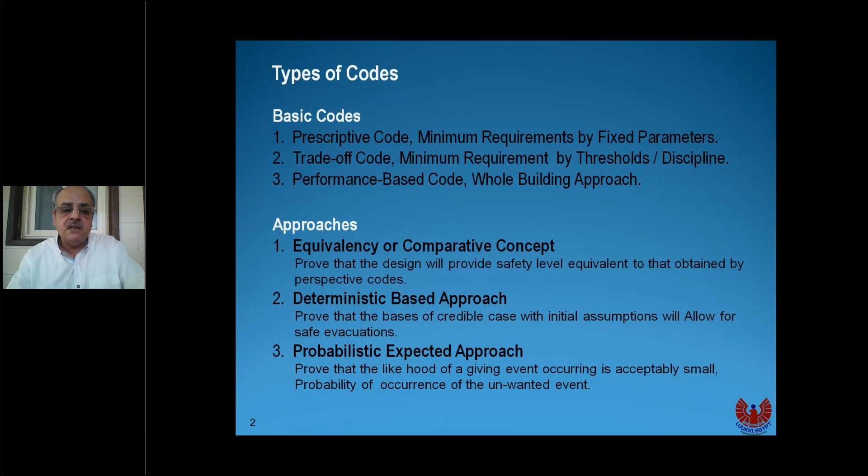Our case study is the need for robust indoor environmental quality within HCF, meaning healthcare facilities. Indoor environmental quality, to summarize, is a combination of indoor air quality, thermal comfort, visual comfort, and acoustics. In our task, because we're talking about air conditioning, we'll focus on indoor air quality and thermal comfort. The remaining acoustics or visual comfort could be discussed by other disciplines.

So if we need to improve the indoor environmental quality to assure there is no cross-infection or infection from outside to any place in the healthcare facilities, we introduced many designs for air distribution, for relative pressurization among different zones, and a lot of things.

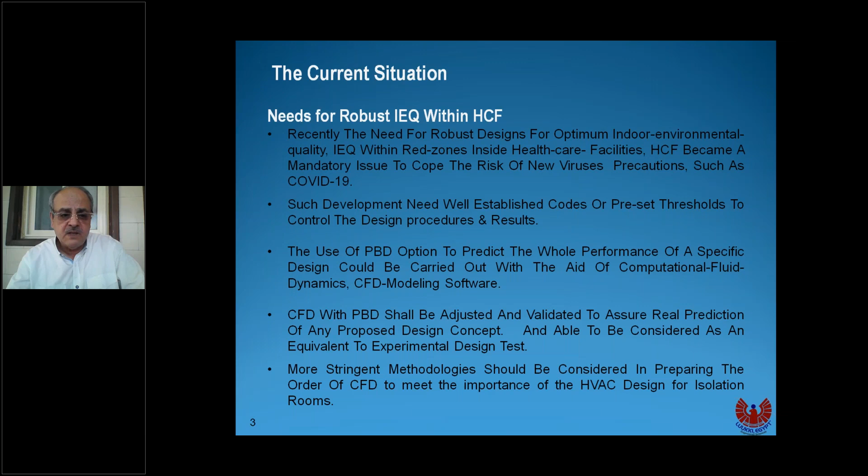Now we are meeting the coronavirus. Previous researchers on SARS before show some issues that could be common between SARS and coronavirus. For example, one of the gained data is that during a cough, there are droplets coming from the patient, about 3,000 droplets, and during a sneeze it could reach 40,000 droplets. By the way, we consider the droplet to be 5 microns.

But up to my knowledge, the COVID-19 size is not fixed all the time. It ranges between 80 nanometers to 200 nanometers. This means that each droplet will contain a lot of viruses inside it if it's 5 microns.

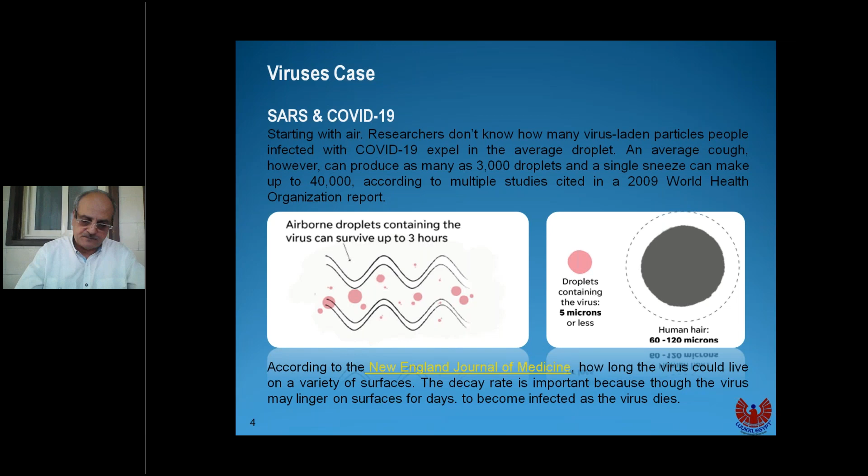We have another issue: we need some way to scavenge any viruses that stay on surfaces, on copper, on the bed, on the furniture, on plastics, on chairs, on sofas. So how can we scavenge this? At the beginning we have to know how many hours this virus can stay in ambient conditions.

For cardboard it can reach 16 hours. For stainless steel it can reach 21 hours. For plastics it could be 20 to 21 hours. This is very important to know, because beside the continuous cleaning and sterilizing of all the goods around us in healthcare facilities, we need something that can scavenge or dry out these stayed viruses.

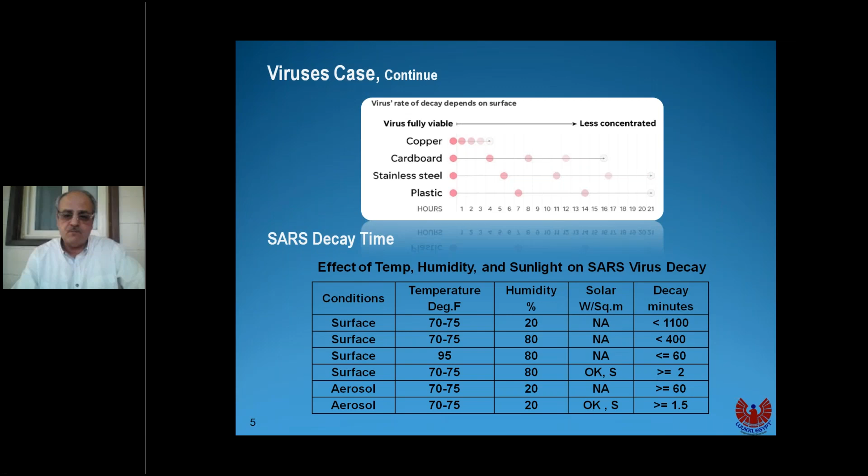A word of wisdom: one of the professional experts in numerical and physical modeling, my professor, said that everybody believes an experiment except the one who did it, but nobody believes simulation results except the one who did it.

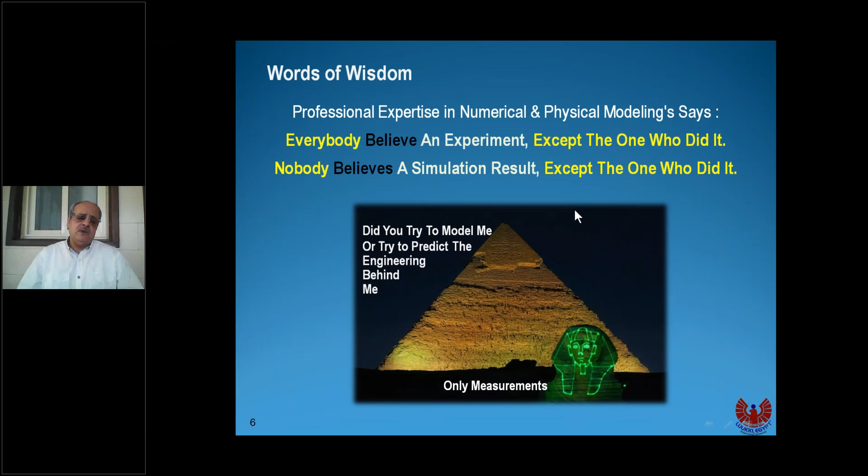Now we want to make an order. If I'm the manager of the hospital and I want to make an order for CFD to study an isolation room, we can move a little bit forward to see what we have.

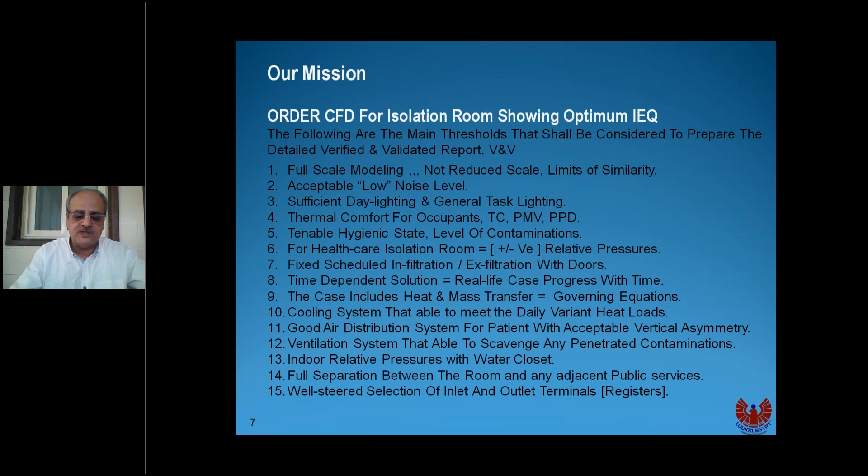Our case is very simple: it's a compound for isolation rooms. This compound is about 54 meters length by 50 meters width, and the height is 4 meters. It includes typical single and double isolating rooms. They have the same size: 7 meters length by 4.5 meters width by 3.2 height.

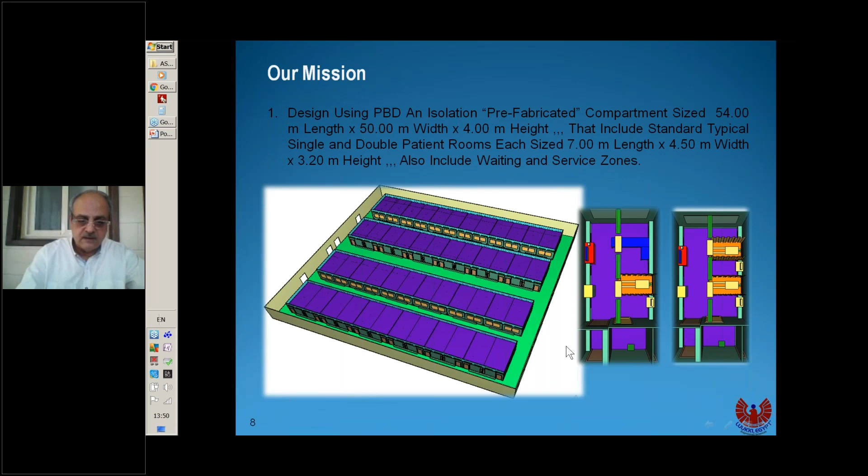What are required to show? We have to go back 20 years ago, 30 years ago, before CFD became a popular solution for the performance-based design or performance-based option. We used analytical solutions before - we can use similarity principles, we can use dimensionless groups to make the modeling or simulation. But it's not a simulation and it's not modeling, it's a pure solution.

So we have to see the flow of air inside the room, and we have to see the drop, the spread of air coming, the asymmetry of the temperature, and the same also for the relative humidity. We have to have a fixed temperature in the vertical direction to avoid any stratification, which could affect the patient or affect the doctors and the people inside this room watching the patient.

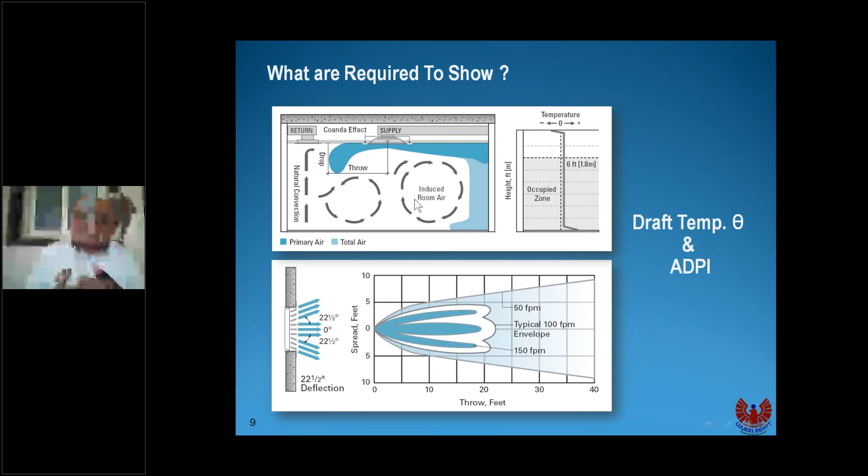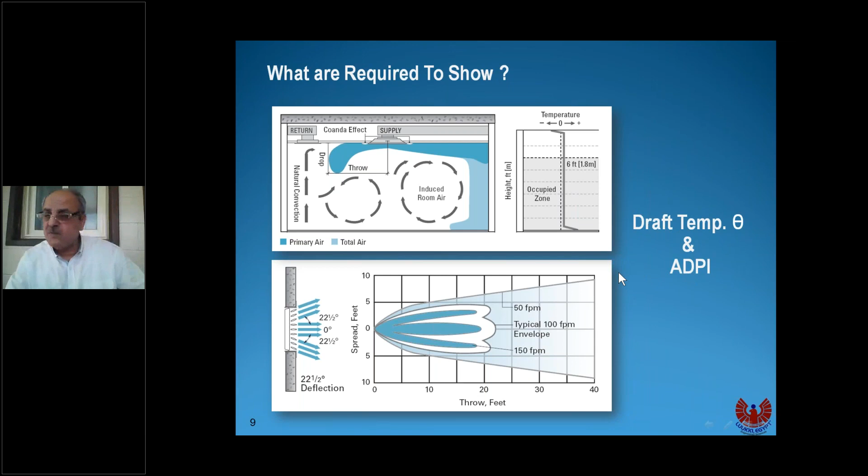Adding to this, the local air velocity is very important - the induced room air that penetrates inside the air coming from the jet, which is delivered from the supply outlet. This is what we call the induction ratio. All this together, we call them two equations: the draft temperature theta and the air diffusion performance index. This means we will use this factor to validate or guide us, to check if our CFD or simulation is going in the correct way or not.

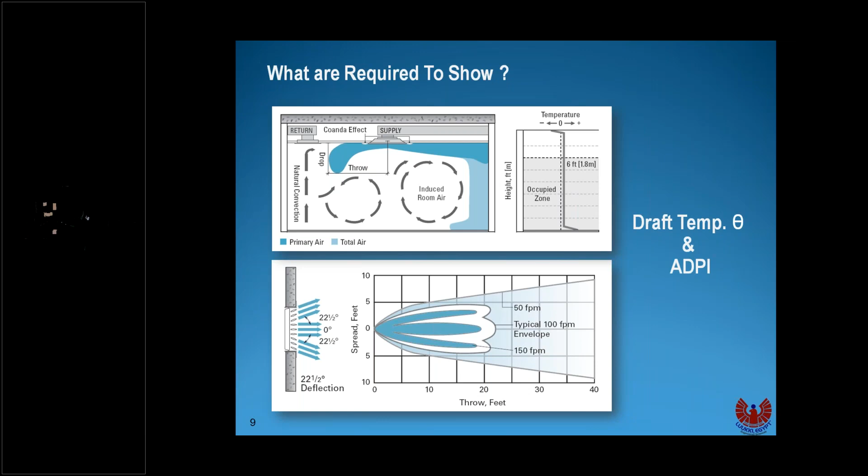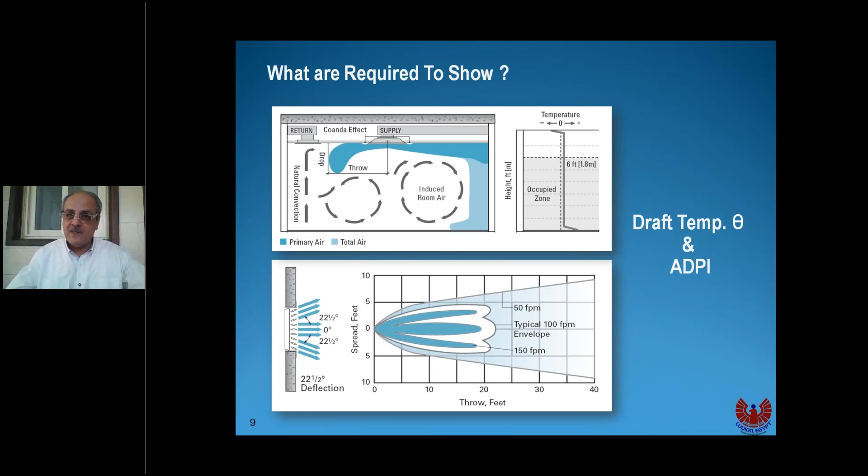I don't need to go in detail of the air diffusion performance - I described the situation of the air distribution inside the room. It is not a factor for the outlet, it's a function of air outlet type - if it's a square, ceiling, register, grill, slot, swirl, whatever - and also it's a function of the characteristic length of the room, not any length, the characteristic length of the room, and the relation between the location of the outlet and the direction of these characteristic lengths.

Third, it's a function also of the air distribution layout of air inlets and outlets, the number of outlets, their location, their height. All these are very affecting parameters that could be clearly declared in the air diffusion performance index. The room thermal load also - here we consider that the walls and the heat coming from the external wall as part of the building envelope, and the glass, the partition, the floor and the ceiling, all these parameters as heating load in watts per square meter or BTU per hour per square foot, will be considered inside the air diffusion performance index.

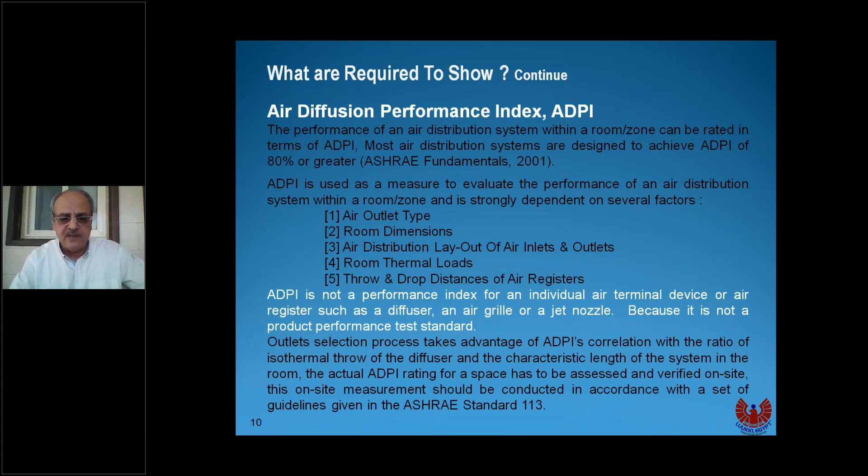Finally, the throw and drop distance. This means that it's a very important throw and drop. Normally, they are important in the temperature difference between the supply air coming from the outlet and the average room air, plus the jet velocity coming from the outlet. Here we can see simply, this is the equation of the effective draft temperature,

and here the air diffusion performance index. The details of these equations you can find in all references in ASHRAE handbook, fundamentals, in details, and how you can use it in reality.

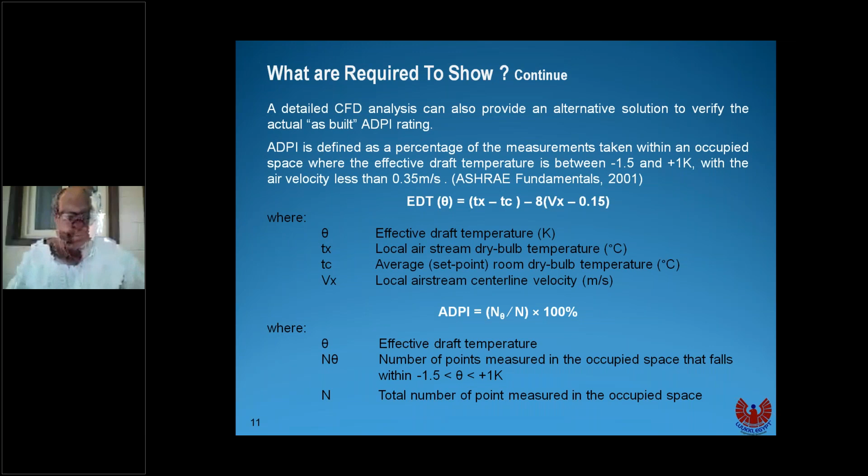Again, we need to discuss another important issue, what we call the local mean age of air in a zone, LMA.

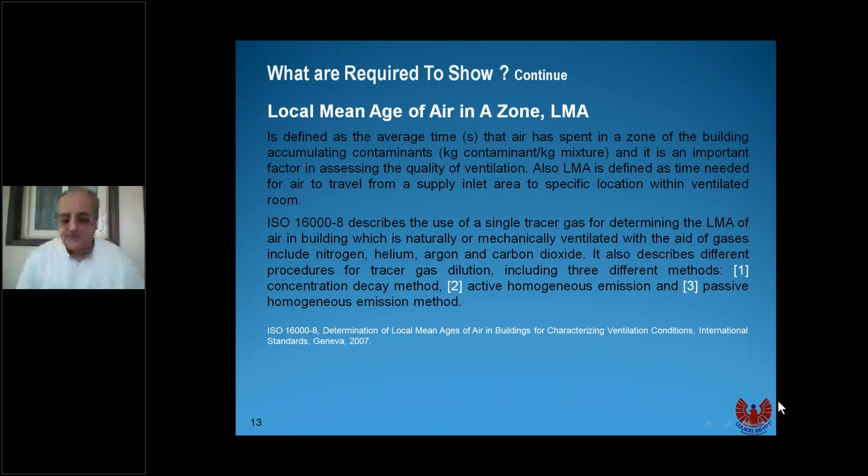If we are talking in a hospital or in an isolating room, we bring air from outside and we sterilize it, clean it very carefully, and treat it, cooling or heating, whatever, and feed it inside the room. If the room is isolating, very critical, we have to use fresh, 100% fresh air, same like intensive care or operating rooms, to avoid any recirculation of these infections.

Sometimes we make it positive pressure and negative pressure. For example, if the patient has a problem that could be affected by any other disease, like AIDS, his room shall be 100% positive pressure. In our cases, isolating rooms could be for corona COVID-19, could be positive pressure, but sometimes we can make it relatively negative pressure. Actually, the zone compounds will be positive pressure, but relatively, isolating rooms will be highly negative compared to the corridors. This is a gradation of the pressure distribution.

Now, the local mean age, what does it mean? It means how many minutes, how many seconds. This means that our case is time dependent all the time. Time dependent, the time is a factor. If I want to scavenge viruses from the surfaces, I have to consider the time. If I want to calculate the local air diffusion performance index, I have to check the time, and the change of the draft temperature with time.

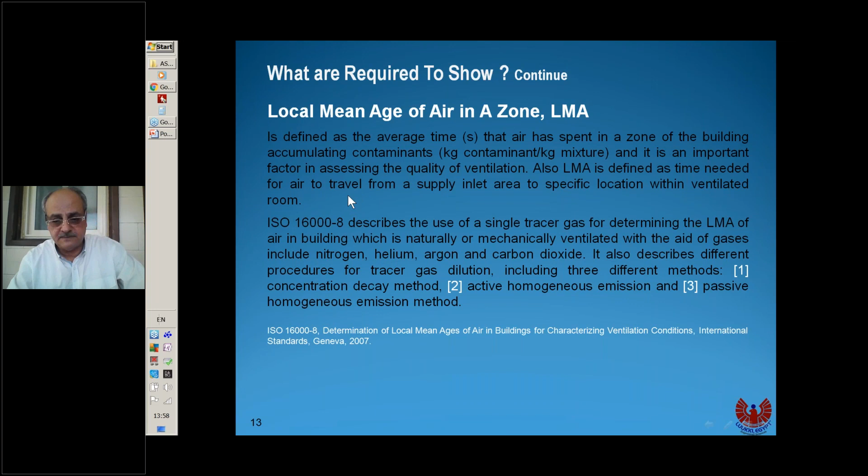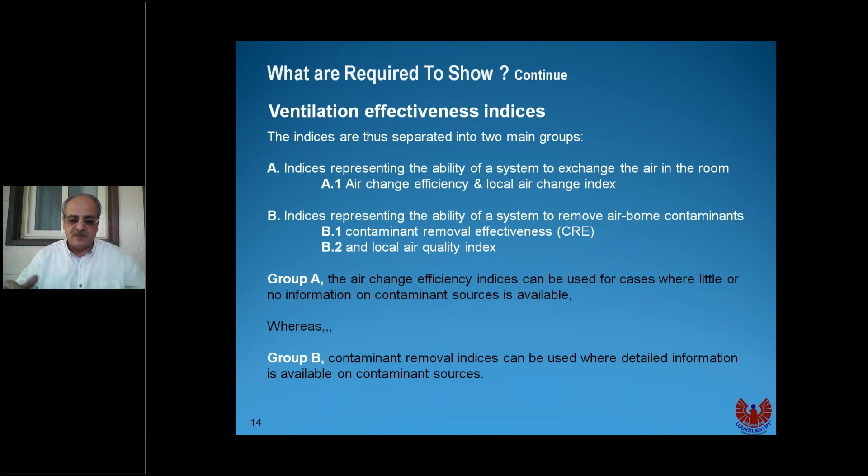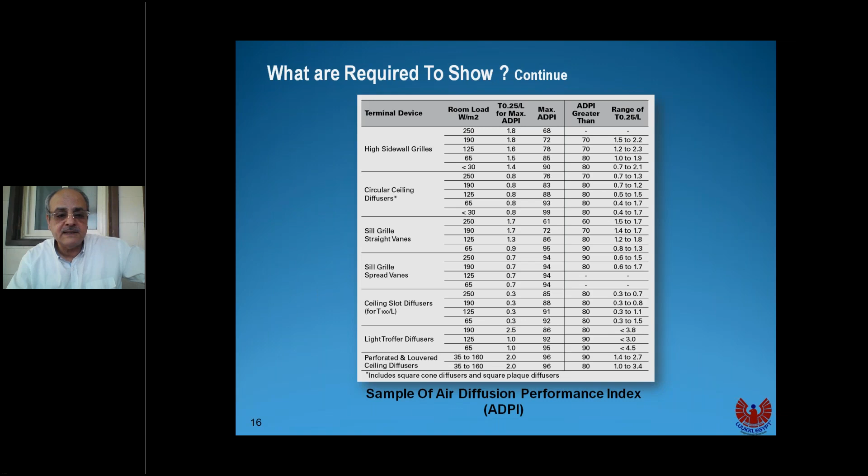Now, for the modeling procedures, as we mentioned, we have this compound. So this compound shall, first of all, be analyzed using CFD in our case. We mentioned that our case was designed 40 or 50 years ago with empirical correlations. Now we want to make some changes in the air distribution inside these isolating rooms. This will be a typical room.

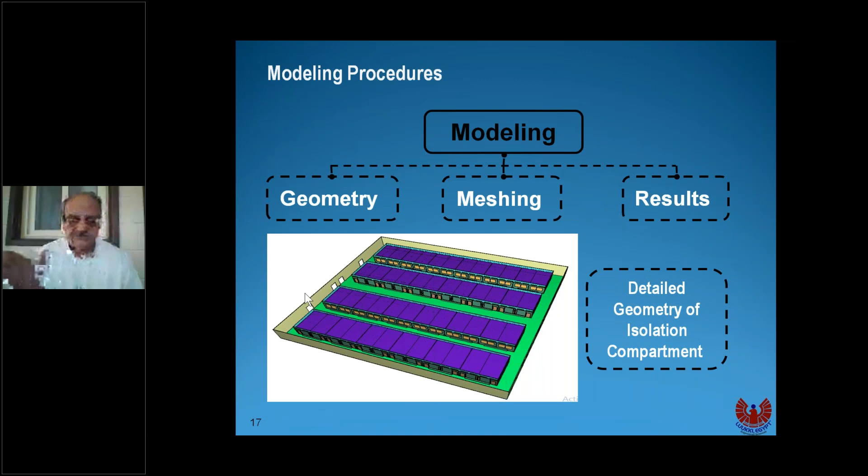We have this, this is the single bed. So first of all, if you want to order, you have to ensure that the detailed geometry shall be considered. If you want to make some simplification to simplify the system, it's okay, it could be done, but the simplification should have a minor effect on the system distribution.

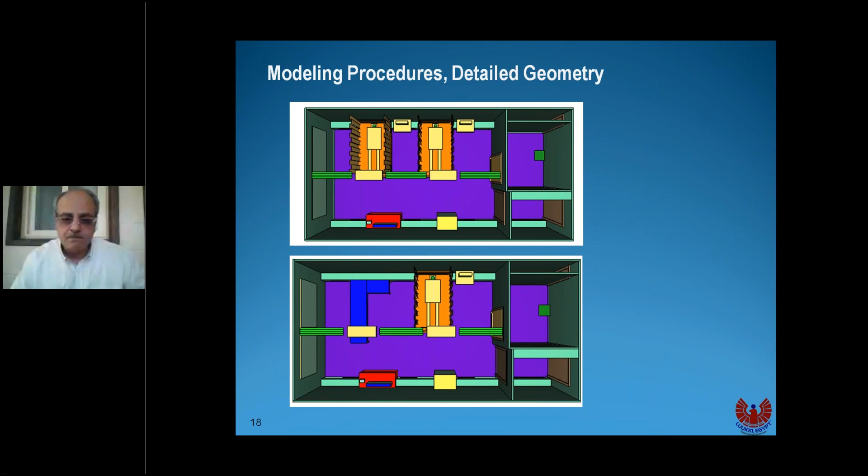Here you can see the details. You can see the curtain, and this curtain is designed as strips, 15 centimeter wide strips.

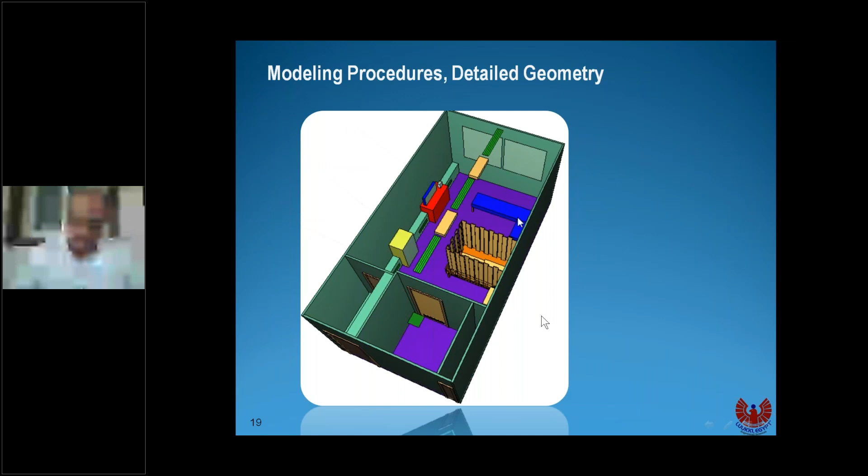And the length of it is about 2 meters. Okay, it could be transferred. Professor Ahmed, it's not important.

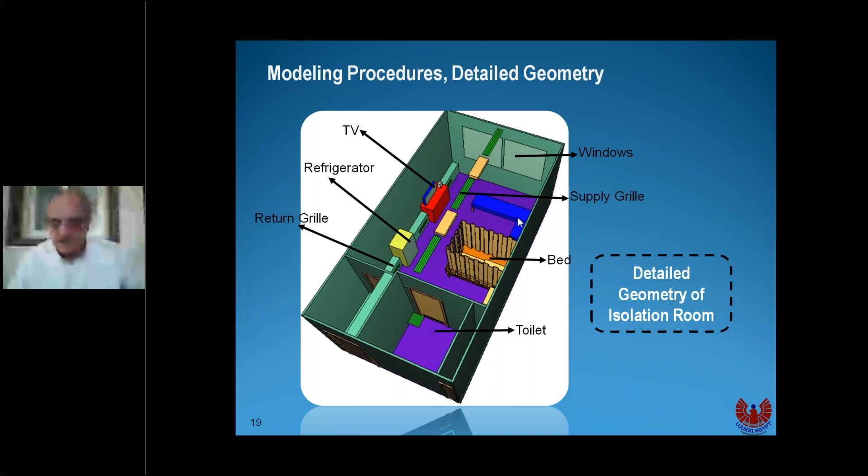Professor, this is Freddy. Sorry for interruption. Can you try to turn off the webcam so that the sound quality will be better, because sometimes some interruptions happen to the connection. The webcam, close the webcam. Your webcam. Okay. Yes, it's okay. Thank you. Please continue. Yes.

Now, you have to know the windows with their material, and our diffusers have 2 slots, each slot about 5 centimeters. We have a TV, it's a source of heat, a refrigerator, it's also a source of heat, the location of the exhaust grills at the floor level, the bed, and here the water closet or the toilet. Okay. After drawing, complete drawing, we have to make the meshing, and this is the...

Professor, sorry for interruption again. The presentation slide is the same, it's not changing. No, it's changed. Moment. Okay. It's okay. Now. Yes. That's good. It's okay. Yes, it's working. Check, please. It's okay. Okay.

Now for the modeling procedure, we have to make the meshing. To think about the meshing, you have to think, what do you want to see in this room? If you want to see the air coming from the outlet, this means that to allow the CFD to see the outlet, this tool shall have some points inside this outlet, inside the 3 centimeters or 5 centimeters in the outlet. This means that you have to prepare a very fine grid. But a very fine grid means that you need a lot of grids inside this room, and a lot of grids takes the computer a lot of time.

Anyway, in our case here, we use a mesh size to check the validity, for this case 5 millimeters by 5 millimeters by 5 millimeters, including 1 million cells. Here we need to see very fine, because we need the air coming with the aerosol, and you will see this in the videos. All these items need a very fine mesh.

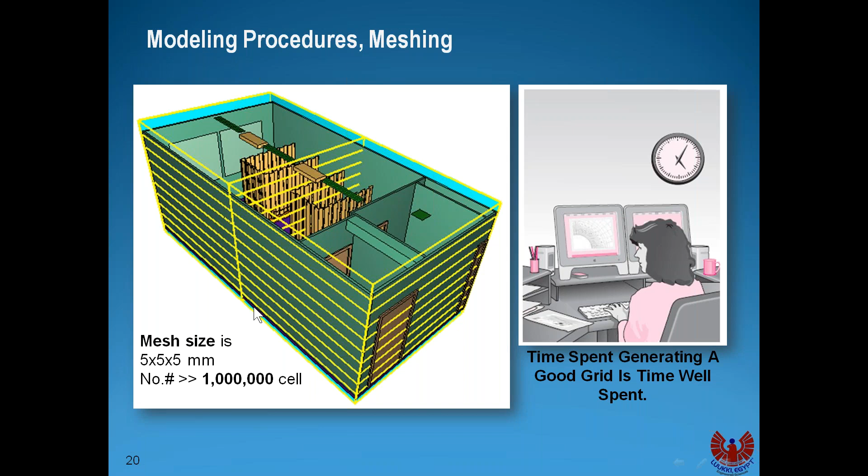And we have the second one. In the market, we have a lot of abilities and a lot of types of unstructured grids that could be used here. You have to ask for the experience, and the experience is the accumulation of trials. So your trials for simple cases or even complex cases will add knowledge to your experience to judge in this case what the best type of mesh to use is, and what the aspect ratio of each mesh is. The aspect ratio means the relation between the hydraulic diameter and the height of the mesh, if we consider it as a cone.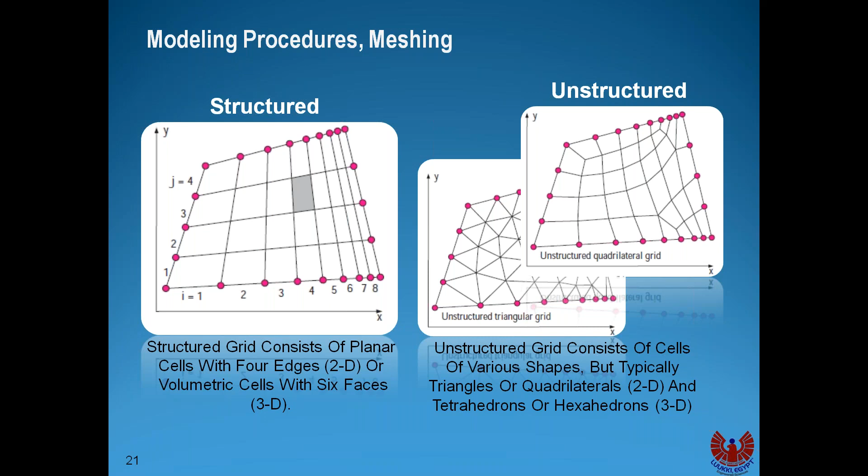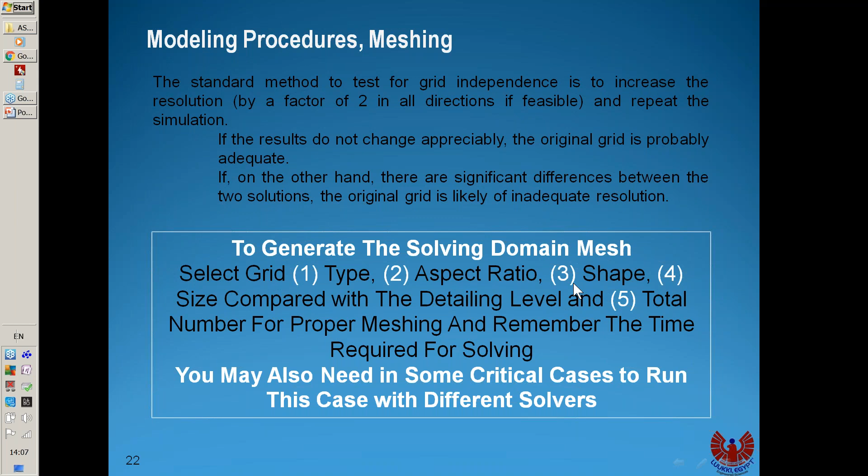So to generate the mesh in the solving domain, we have to select the type of grid, its aspect ratio, its shape, the size of each grid compared to the level of detail in the domain that you want to study, and the total number for proper meshing. But we have to remember the time required for solving.

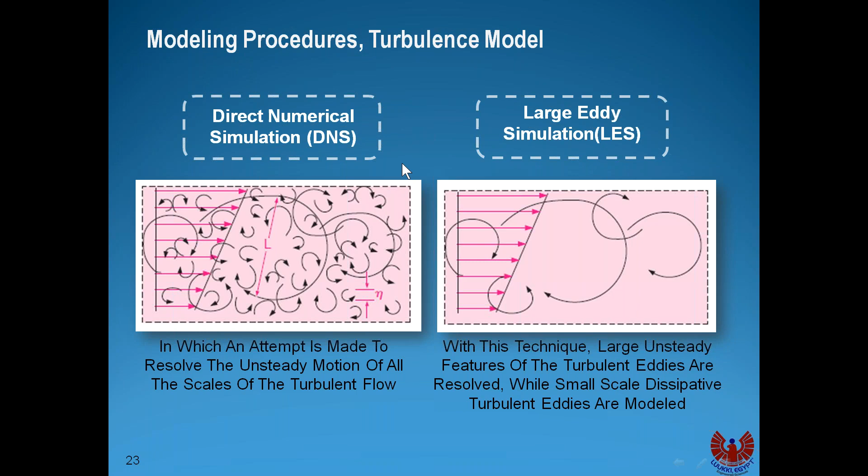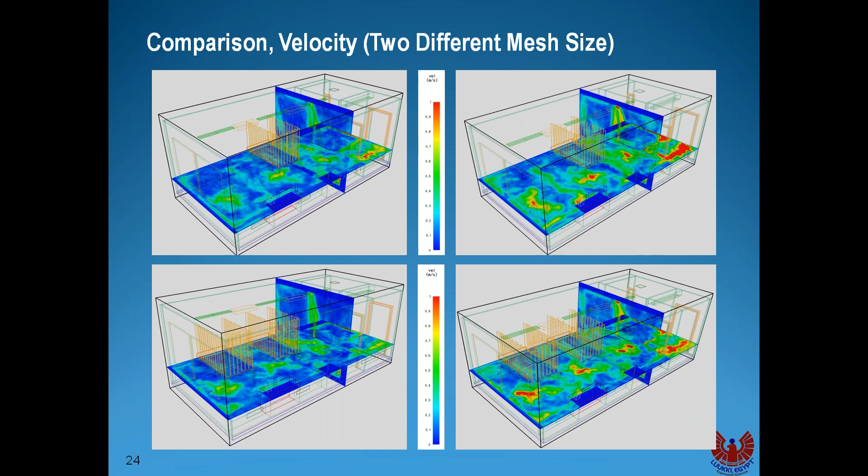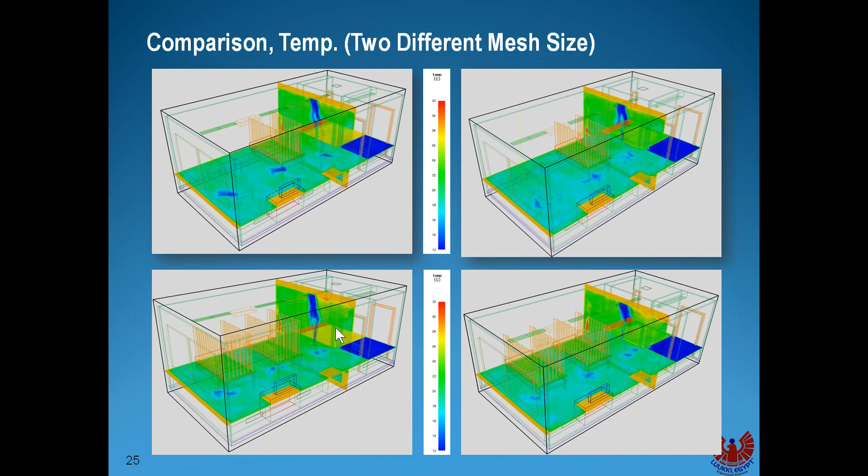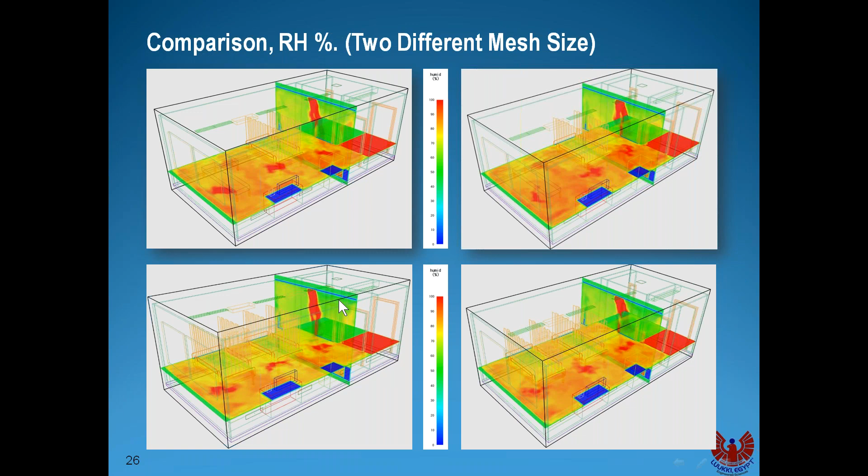Here you can see also the relative humidity, the change in the relative humidity, the same time, the same place, but here, these 2 screens, with the bigger cores, what we call it, coarse cells, more than 5 centimeters by 5 centimeters by 5 centimeters. You can see here, we will introduce now the results of, for example, the video. This means that you have to solve based on the time. And we will find this very clearly when we go to the tracer gases.

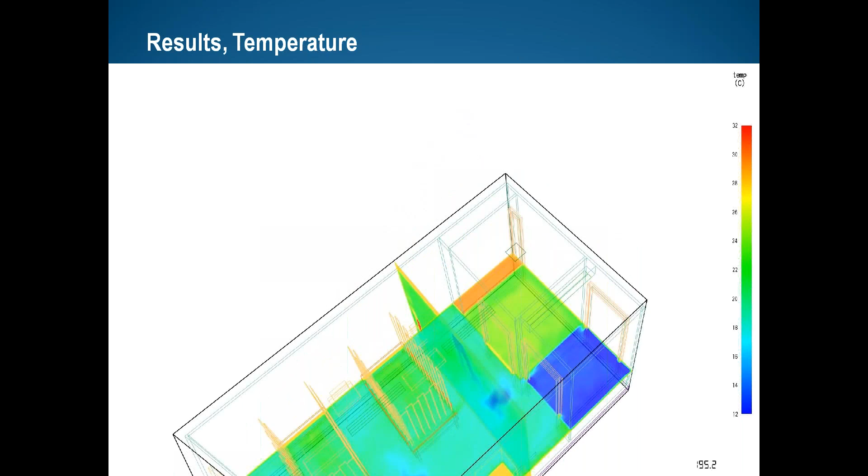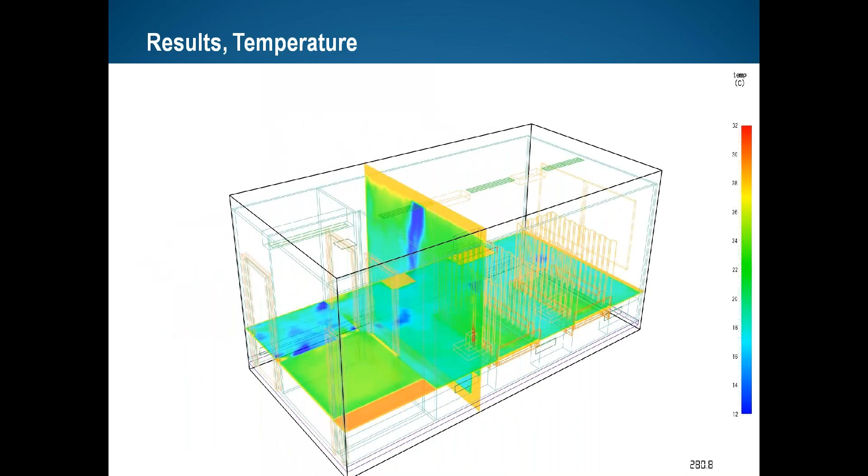Okay, we can stop it and we go to the next. Oh, this is the velocities. This is vector. You can see the vectors in the 2 planes also. For sure, the presentation does not explain all the clear data, but you can predict here what is the size of meshing that we used.

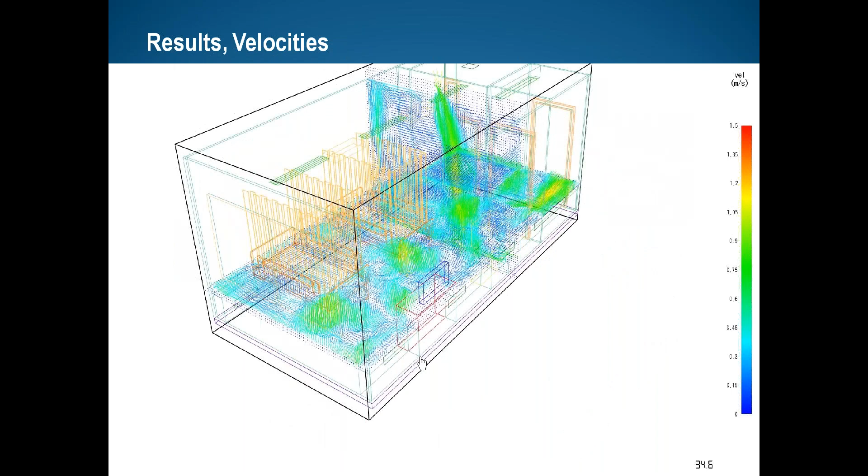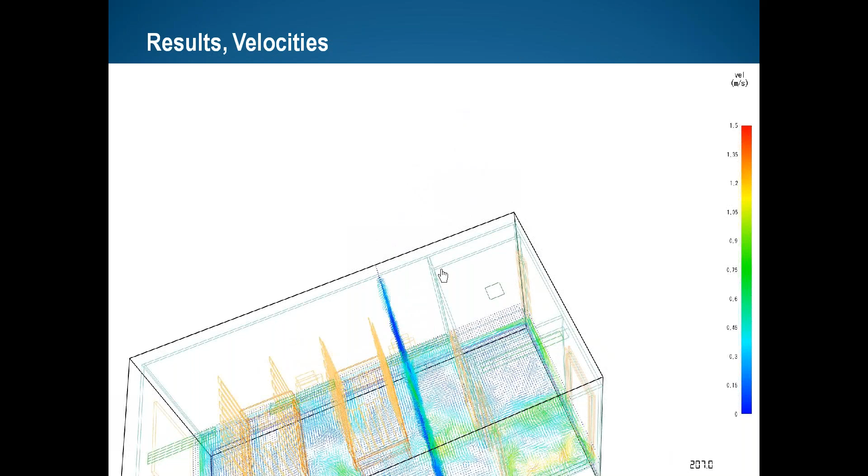Most of the softwares that are available in the market, what we call CFD softwares, can produce an Excel sheet for all the points you may define. For example, if you have 3 million grid cells and you want to see the results every 3 seconds for example 3,000 points around the patient bed, you can bring it in an Excel sheet, and after you take it in the Excel sheet, you can calculate it for the draft temperature and air diffusion performance index, and compare this with your results.

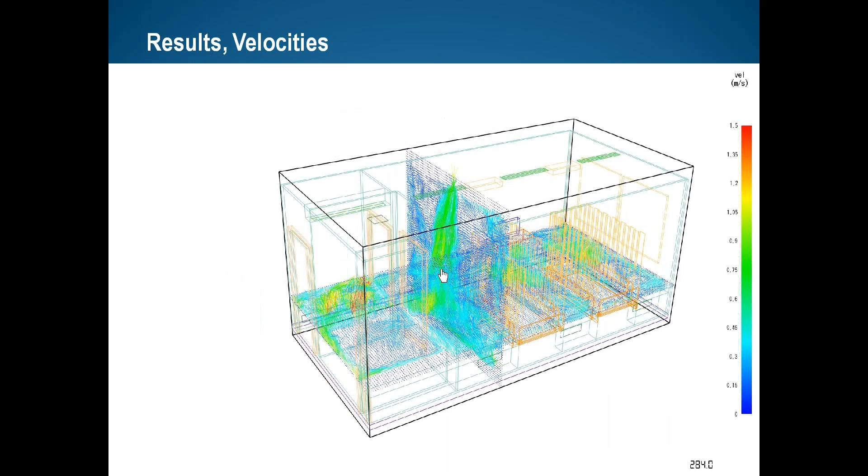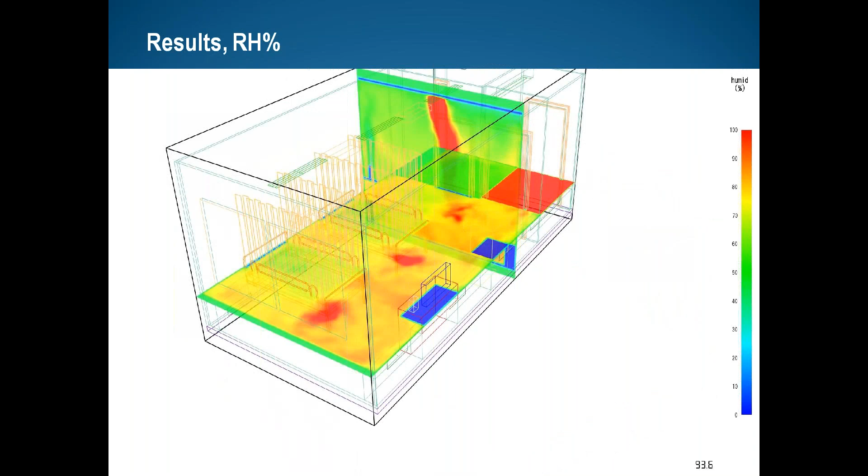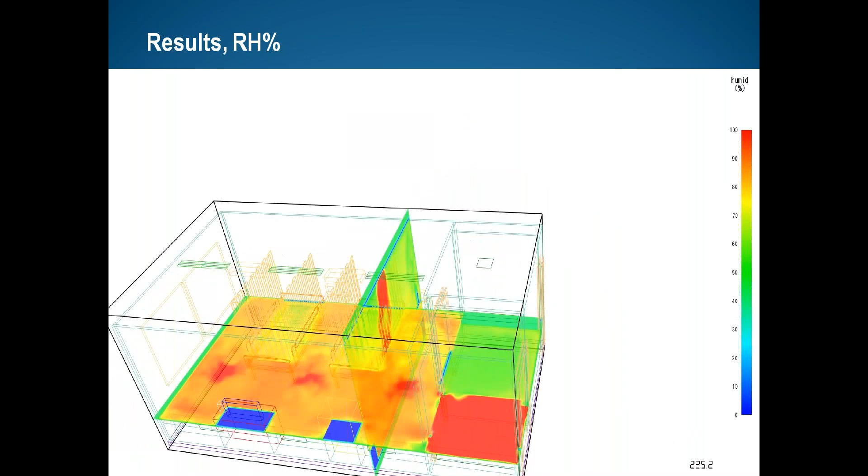Here the relative humidity, the same. By the way, these case studies that we are describing now, we have 40 cases for the air distributions and for the number of air exchanges, because we need to make the design able to scavenge or dry any residuals of the sneeze or cough, so it can be moved with the air to the floor and go out, and then in the void of the raised floor we can sterilize it or whatever.

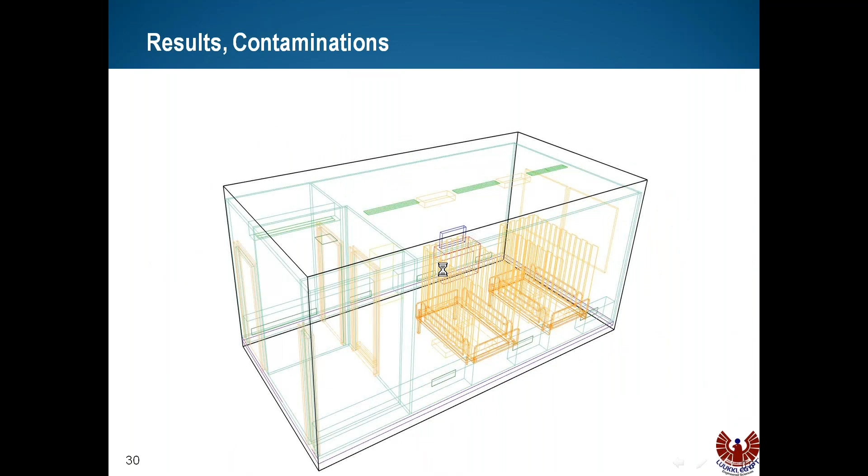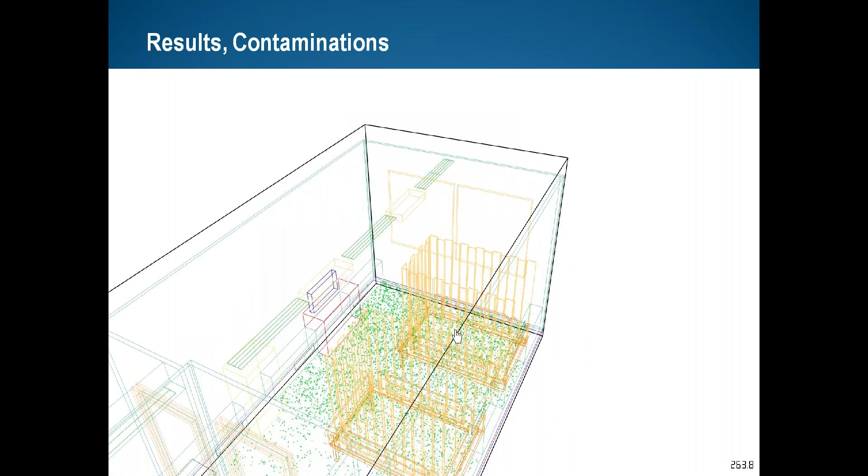Here's the contamination, and please, here, this is the effect of sneeze. These small particles represent the 5 micron particles, and you will find it decreases. And then you will find that the patient will sneeze again. I hope that the video can show it clearly to you. Yes, you see it. The most important issue in this design is that we take all the contaminated air to the floor.

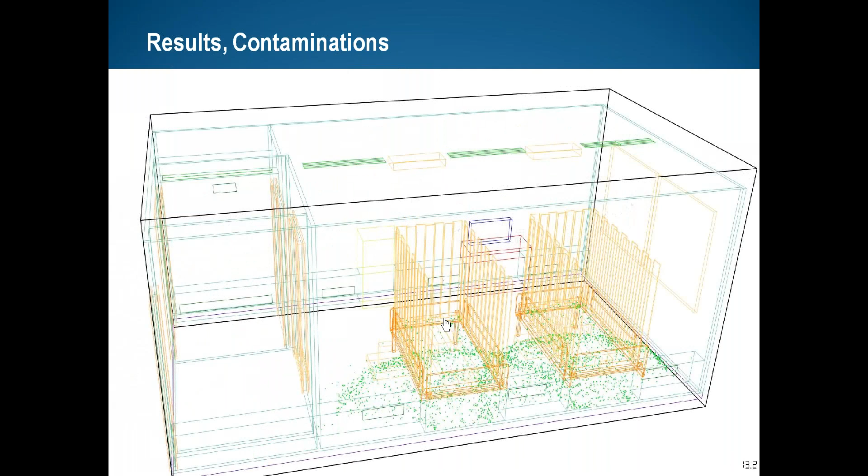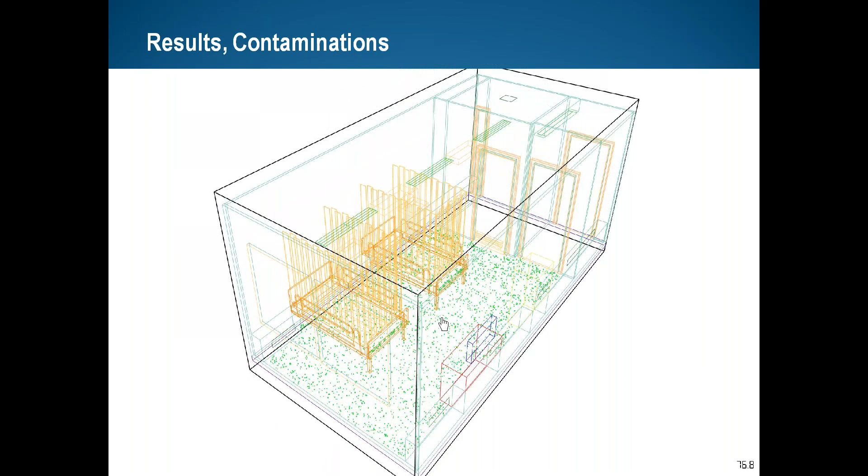So our summary now, we can conclude what we introduced today very quickly, that CFD is not a design tool, it's a tool to predict that our design is workable and satisfies the previously mentioned thresholds in any code. This is the first point. In our case, our thresholds in the isolation rooms will be the thermal comfort conditions, the number of air changes, the cleanness, the noise, the temperature, the relative humidity, all this together. But at the same time, all this together shall be controlled to avoid any generation of viruses or fungus.

So we are talking about thermal conditions and indoor air quality. And these will be a function of the time all the day, because all the day the patient could sneeze or cough, and the doctors could inspect 2 or 3 times per day, plus the other services, foods and medical materials. So you have doors that shall be opened and closed. This means that we have to control the pressure also. So we have to control the temperature, the local velocity, the pressure, the humidity, and the air contamination inside this room.

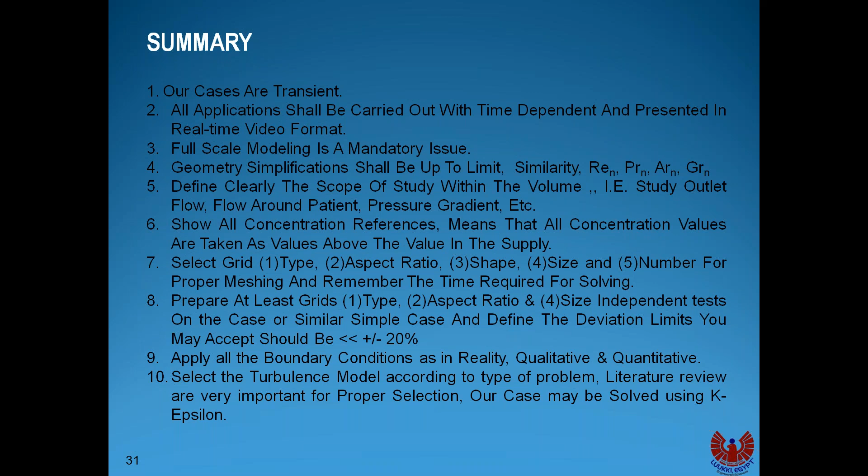Output results from the CFD shall show temperature, local velocity, relative humidity, contamination concentration, turbulence intensity. Then you take it as an Excel sheet and process it outside, or you can use it inside the software. You can give a programming module to the software to make side calculations to calculate the thermal comfort, the predicted mean vote, PMV. You can find the TC, PMV and PPD, percentage of people dissatisfied, in ASHRAE 55, for thermal comfort.

Then you can calculate the local mean age, this could be estimated, and then the air diffusion performance index. You can input the equation of the air diffusion performance index inside the simulation program to calculate it for you. Also, here it's repeated again: air change effectiveness. This gives you after how many hours the room will be clean. And here the contaminant removal effectiveness and the air quality index. All this could be calculated as we mentioned before.